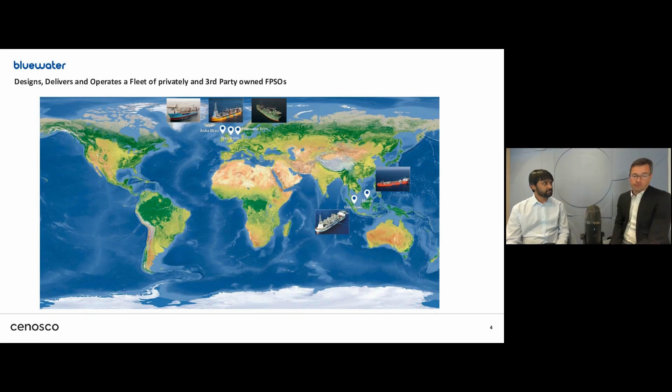We also operate third-party owned FPSOs, where we provide a corporate management system. We provide also experienced and qualified workforce. And finally, Bluewater has 40 years experience in operating FPSOs. So that's very valuable for third-party owners of FPSOs. Great. Thank you, Jocelyn. Thanks for a very good, detailed and insightful overview with regards to what Bluewater are currently doing in the energy landscape.

So, Jocelyn, before we deep dive into our topic of today, the Life Extension Project, maybe I can provide a bit of context with regards to who our typical audiences are. Our typical audiences are experienced professionals from the energy industries, mostly coming from inspection, integrity, reliability, materials and corrosion engineering background, but we do also have young professionals joining in as part of this webinar as well. So let's try to make this session a bit engaging so that it's also useful for someone who's joined the energy industry very recently. They can gain something out of this session, but at the same time, let's also make it enticing for the experienced professional as well. How does it sound? Very good. Let's do that.

Okay, so before we deep dive into the life extension project, Jocelyn, maybe could you give us an overview with regards to the FPSO that we will be talking about today, the Haewene Brim FPSO? Yes, so today we are going to use the Haewene Brim FPSO as an example. So once again, FPSO stands for Floating Production, Storage and Offloading Facility. Haewene Brim has been operated in the UK continental shelf since 1999. And as you know, this is one of the harshest environments on the planet. And we are operating under the UK safety case, which is also a very strict regulation.

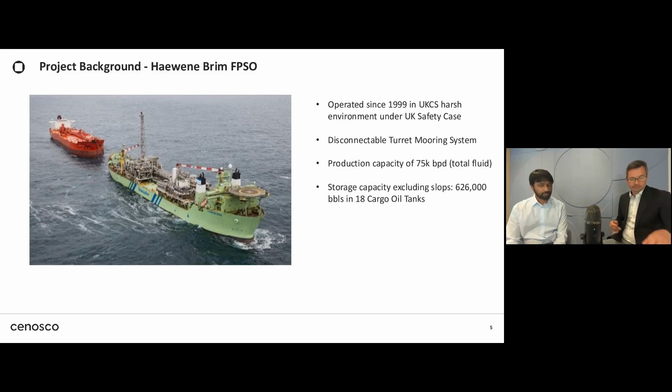So essentially, this is the Haewene Brim, and so you understand the purpose of an FPSO is to produce oil, water, and gas from the subsea wells, separate them into 3 phases, and then export the oil as it is the most valuable component. Good to know that, Jocelyn.

So, just as a background, HB, the Haewene Brim, started to produce and export gas from the recent life extension project in 2021, 2022, if I'm correct. Could you please highlight a bit about the background of the campaign that facilitated the upgrade and the life extension as well, and what are typical activities that were carried out as part of the campaign?

So until 2021, all the gas we were producing was re-injected into the reservoir, maintaining the reservoir pressure. But from 2021, our client told us that there's more value to get out of the gas if it's exported onto the market. So essentially, that was the driver for this campaign, to convert gas injection into gas export. Also, the client informed us that there may be a strong likelihood that we may produce sand very soon. So as a result, we had to install a sand handling module.

And then when you take this decision, which is a very heavy decision to go back to the yard for such a modification, then you take all the opportunities you have to carry out other inspection, other maintenance, and other repairs. So all in all, we had to consider the main driver, but also all the other scopes we had to carry out at the same time.

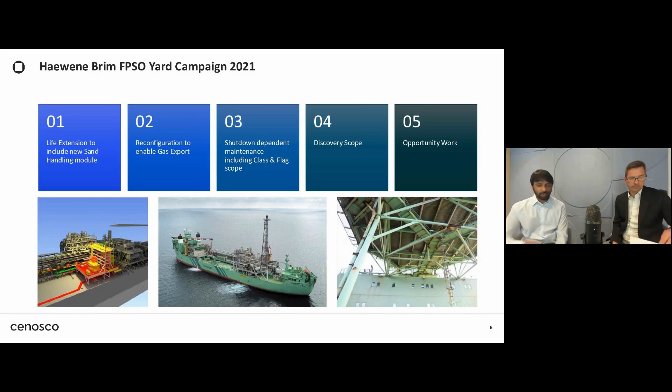Okay, good. So to start off with, the activities 1 and 2 that are typically highlighted. So of course, there was a new sand handling module that was fitted because it was expected that there will be sand produced from the wells. So the facility had to deal with the sand that was being produced. And of course, reconfiguration to enable gas export as well.

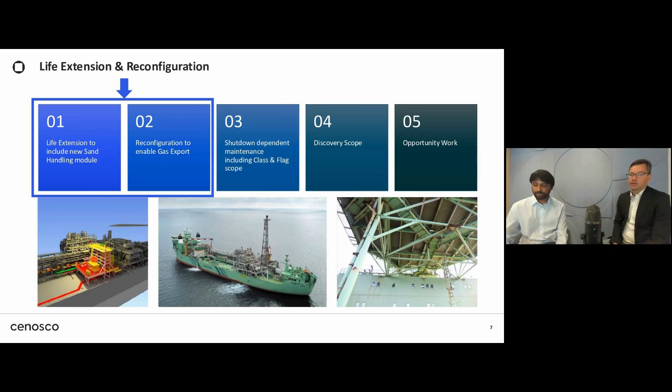So could you just throw some light on what were the typical activities that were executed as part of fitting the new sand handling module and the reconfiguration to export gas? Sure. If you go to the next slide. So here you can see the module that was fitted. We call that a pancake module because essentially we are fitting 3 major systems into one module.

So on the left, you can see the sand handling module. In the middle, you can see the gas export valve, but also the fiscal meter. And then on the right, that's what we had to add, which is essentially made of deluge system and utilities. But it doesn't come down to just that.

We also had to make major modifications to the gas compressor. We had to make major modifications to separators. We had to add interconnecting piping and cables. And finally, as you can imagine, we had to modify the logic within the ICSS, which is our integrated control safety system.

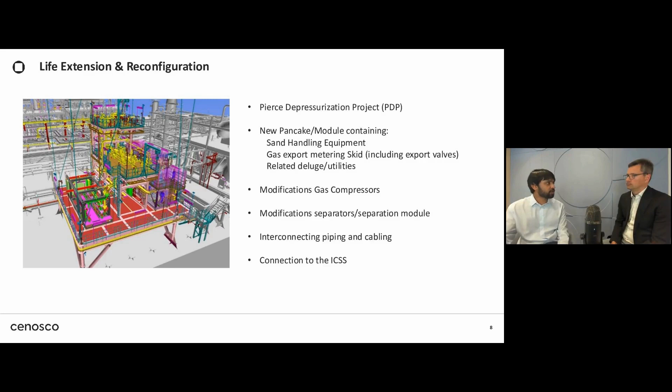Okay. So just for my understanding, there were expectations that there could be sand in the system. So in order to deal with the sand, a new sand handling module was fitted. But with sand, there is a potential threat of erosion with the corresponding velocities and flow rates as well. So to handle such conditions, modifications were required on specific existing equipment accordingly.

Interesting to know. So that appears to be quite a lot of activities that were carried out in fitting the new sand handling module, and in modifying your existing equipment to handle the sand and export gas as well. Yeah. Good. Okay. So going forward, let's try to focus a bit more on the life extension scopes.

So maybe let's try to keep the context relevant to inspection, integrity, maintenance as well. So maybe could you just throw us some light? Let's not just focus on the execution part already. If you could just throw us some light with regards to how these life extension scopes were typically identified, how were they planned, and finally we can look at how these life extension scopes were executed and what were typical follow-up activities as well.

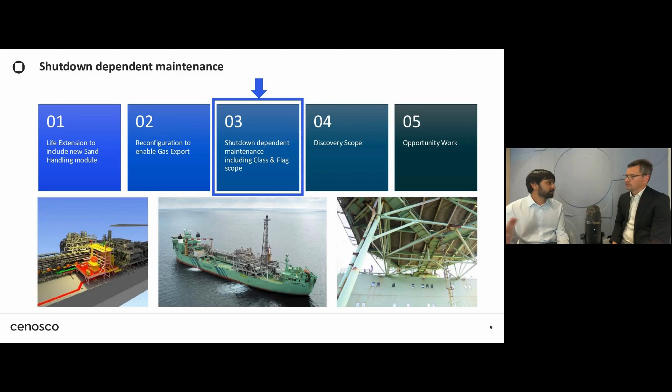Absolutely. So before we dive into the scope itself and answering those questions, which are really critical, I'd like to go through the amount of data we had to process. So the amount of registers we had to go through, the amount of systems we had to go through, and I'm sure you'll appreciate the size of the scope. So let's start. I've got a list here.

Bear with me. So first of all, we had to go through our MCDR, which is Mechanical Corrosion Damage Report Register, otherwise known as Anomaly Register. We had to go through our DLRs, which is a Defined Life Repair. Essentially, these are temporary repairs. Fabric Maintenance, Corrosion Under Insulation Register, Small Bore Tubing Register. We also had to go through our CUPS, which stands for Corrosion Under Pipe Support, a Dead Leg Register,

a Passive Fire Protection Register. And then we also had to go through our system Maximo, which is our CMMS, Computerized Maintenance Management System. Then we had to go through our RBIs, so risk-based inspection planning. Then go through our SIMP, which is our Structural Integrity Management Plan, which includes RBI and class requirements. We had to go through our life extension register, and finally we had to take into consideration all the equipment we had to mothball or decommission.

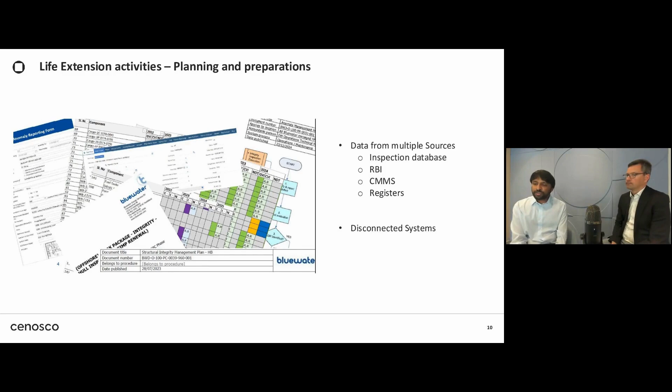So you gave us a good context with regards to the background behind the scope identification part. But of course, of the scope that you had identified within your inspection, integrity, and maintenance teams, executing 100% of it in the life extension project phase in the yard is usually not realistic, right? So what was Bluewater's approach in terms of screening the scope and really dealing with a specific scope list that could be achieved within the agreed timescale for the yard period? Yeah, absolutely.

Addressing 100% of the scope identified for the past few years is completely unrealistic. So we had to define a workflow where we would prioritize which activities, which issues we would tackle as a matter of priority. So we established this workflow. Essentially, it's a risk-based workflow where anything that's safety critical would be addressed during the yard. Anything that required a shutdown will be addressed during the yard. And every must-have will be done during the yard.

So once we've risk assessed essentially all the activities spread out in all those registers and all those systems, then we can come up with a scope. And then this scope, we propose it to our shareholders, and then they decide whether to go ahead or not. So all the scopes that are not meeting the minimum criteria to make it to the yard are fed back to the backlog. But all the scopes that make it to the scope for the yard then lead to the next phase, which is to go into more detailed planning.

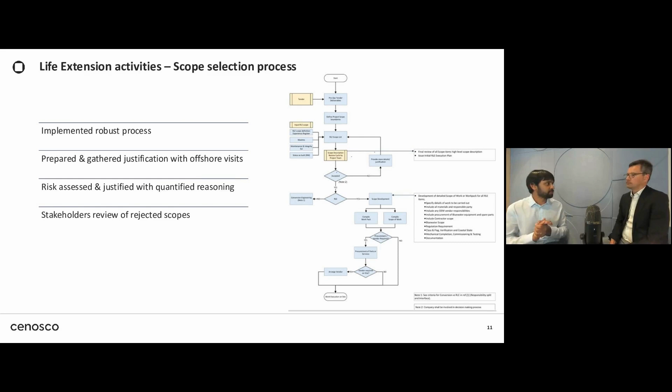Right. Good. That is quite insightful, right? So you had a very robust process. I think some of the flow charts that were used as part of that screening process are also highlighted. So using that robust screening process, you were able to identify really the critical scopes that had to be executed. Any other scope that could be done during normal operations was still parked outside so that it could be done once the FPSO restarted production and operations. Yeah. Makes sense. Okay, so I think you provided a very good overview with regards to the scope screening, which is actually a very key element in this process.

But once the scope is screened, how did that translate to a plan? Yes. So once we prioritize those scopes, we put them in the plan. So in this case, that took us 18 months in the making. Going through all the records, prioritizing, having conversations with stakeholders. So 18 months. And also procurement is key because we had to face very long lead items. So we need to think about procurement way in advance. So once this planning process, defining the scope, prioritizing took place, 18 months, then we can move on to the execution phase.

In this example, we were really unfortunate to be hit by COVID. So that caused many delays and many issues we never faced before, namely having people in quarantine. We also faced issues with Brexit, people from the UK working in Norway. That's another thing with visas. It's really complex to handle. So all in all, probably the project shouldn't have taken so long, but it did. I think the industry standard is around 12 months, maybe less. For us, that was 18 months. But yeah, we had severe issues to face.

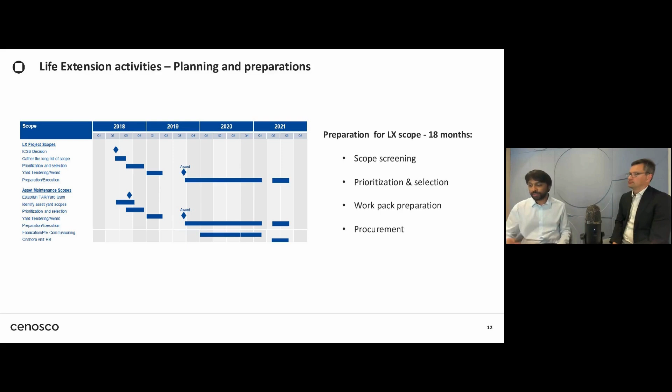From this moment on, Jocelyn, let's maybe focus on the execution part. So far, we have looked into the identification, scope screening, and the planning. So let's focus on what was actually done during the life extension project in the yard, right? Yeah. So let's probably start with the repair activities. These are repair scopes that were actually identified prior to the yard stay. So these are known repairs or known defects or known anomalies that eventually needed a repair action to be carried out. So maybe could you just throw some light on what were some of the repair scopes?

Because being involved in the yard myself, there's quite a lot of repair activities that were carried out. It will probably take 2 or 3 webinars to even cover that. But maybe on a high level, if you could provide our audience some context with regards to what were some repair scopes that were carried out, that'll be very much appreciated.

Absolutely. So mostly we identified those repair scopes on critical equipment. And then we came up with, I would say, 2 types of scopes. One was repair and one was inspection. So first, repair those critical equipment. So you can see a list here and some pictures.

Helideck repair. So we had major corrosion issues on this. Ship side valve overhaul, process piping replacement, produced water flash vessel replacement, topside structure. We had crane overhaul, and then other high critical process valve replacement. So that was based on risks, and then each scope was addressed during the yard.

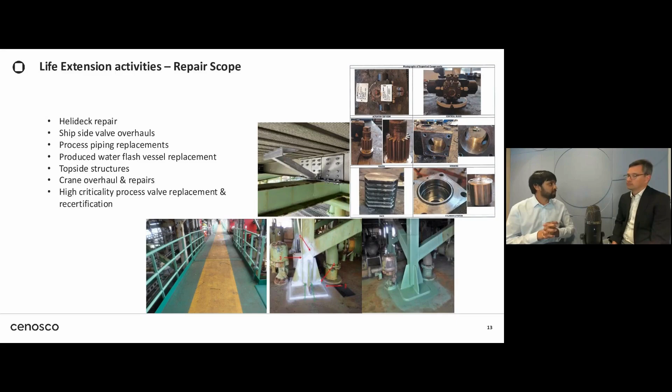Definitely. We need to understand where this is coming from. So we do have an integrity management plan. We do have RBIs, and we do have class requirements. So all that together makes our inspection scope, because we know what to inspect at which frequency.

Some of those inspections are very intrusive, so that's why we take the opportunity of such a campaign to do those inspections. So if I take the example of vessel inspection, it's fairly easy to inspect it from the outside, but it can be really complicated to inspect vessels from the inside, because those vessels are process vessels. You need to isolate them, and sometimes it's not possible to do that during normal operations. Same for tanks. We know that we must inspect them, but again, for isolation purposes, it's sometimes not possible to inspect them during normal operations.

And finally, CUI and PFP. So what we are looking for is breakdown in passive fire protection cover, and when we remove them, we also look underneath to see if there is any corrosion. So all of that, sometimes it's really complicated to do during normal operations, and that's why we use a campaign like this, yard scope, to do this when the plant is completely dead.

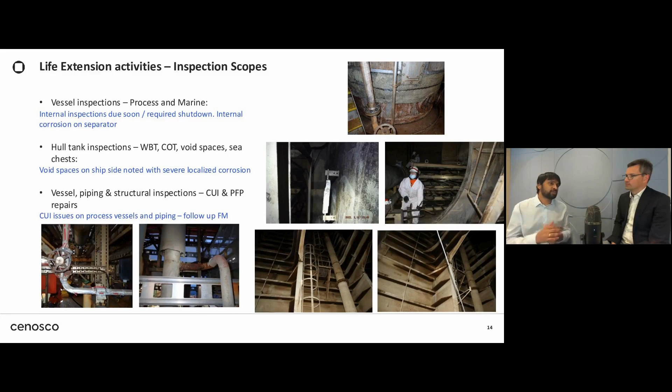But of course, Jocelyn, maybe an interesting question to ask, right? Performing an extensive scope of inspection activity in the yard is one. What about findings from these inspections? How were these identified and treated? And maybe another question to add on to this: how did Bluewater ensure that these discovery scopes did not pile up and did not affect your project timelines? So that is something that we can probably highlight.

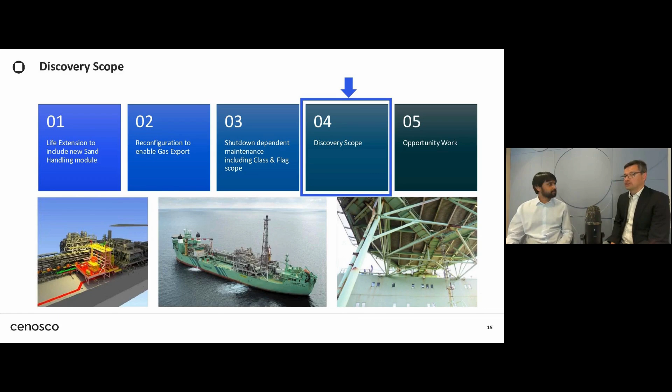Absolutely. So whenever you inspect, you will find new scope. You will find things. So that has to be taken into consideration in your project in terms of timeline, in terms of resources, and I would say it's quite significant. So we definitely must allocate some time and resources to address discovery scope.

So the way we prioritize that is the same way as we prioritize the other scope. It's risk-based. So we assess the consequence of having that fail, essentially. And we assess whether or not we can repair it on the spot. Do we need yard conditions to repair it, or can it be done during normal operation? Do we have the right isolation in place? Are your isolations good enough? So all those kinds of questions. So of course, if it's safety critical, it will be done on the spot because it's our highest priority.

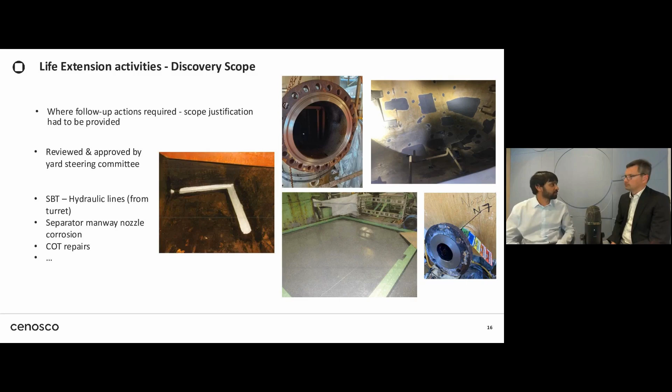But then for anything that's not safety critical or environmental critical, then we need to weigh whether or not we extend the yard scope and we address it now, or if it can be done later on during normal operations. Interesting. That's a very good detailed approach, I would say, much more robust as well, so that you are in control with regards to what you're inspecting and what you're finding, and ensuring that the right actions are typically carried out. And if it's not a priority, then it could be executed as part of regular operations as well. So, yeah, good to know that.

And maybe, Jocelyn, just to cover the last bucket, right? So when it comes to life extension projects, we did touch upon repair scopes, inspection scopes, discovery scopes. But what about opportunity scopes in general? Was there anything lined up or planned in with regards to opportunity scope? And how much of those opportunity scopes were typically executed in the yard?

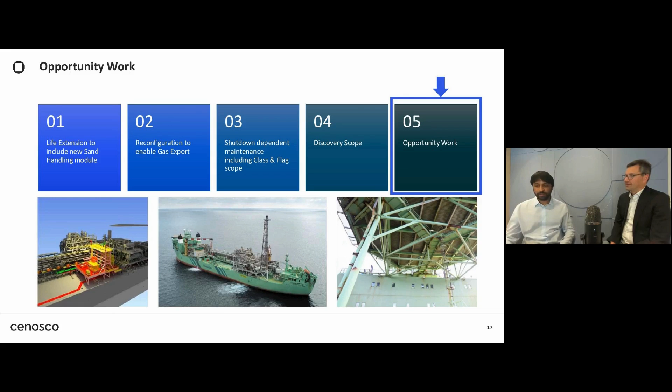So unfortunately, I have to say fabric maintenance is always the activity that comes last. And this is what we call opportunity scope. So if we've got the resources, if we've got the time, then we will address what fabric maintenance requires. But I've been in many projects, and unfortunately, it always comes last.

So in this campaign, we were able to address issues such as main deck, process piping, vessels, and external hull. So we had some resources allocated for fabric maintenance scope, but then again, with all the issues we had with COVID, with all the rest of it, visa issues, sometimes we had to drop some of the fabric maintenance scope.

Right. Okay. But I presume the fabric maintenance scope was also prioritized based on risk so that you can target the critical ones to start off with, and the lower critical could be done as part of regular operations. Absolutely. So we do have a fabric maintenance register. And in the register, it's all ranked by risks. Good. So we tackle the highest risks first, and then most of the time, what has a lower risk can be done during normal operations. Exactly. A very good structured approach, right?

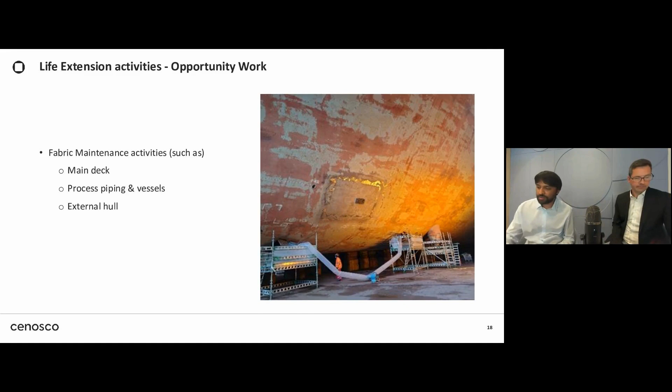Good. Okay, Jocelyn, thank you so much. Thank you for that insightful discussion about Bluewater's involvement with regards to the life extension project. Maybe to the benefit of the audience, could you provide a summary on key highlights from this project and what would be ideal recommendations as well?

Sure. So it's clear that you cannot address 100% of your scope. You have to prioritize, and you need to take on board your stakeholders. So you need to make clear what's the top priority, and then make the case for it. So you need to show your risk ranking strategy, you need to show your method, and only then can you propose a scope.

So there's a must-have scope, what drives the yard scope, and then there's what we must do as part of our normal inspection or normal repair, and then you've got the opportunity scope. Then again, you need to keep in mind that you will have some discovery scope, and you must allocate some time and resources for that. Of course. So bottom line is you will have more work than time and resources, essentially. That's what I'm trying to say. So that's why you need to be ruthless as to what you prioritize.